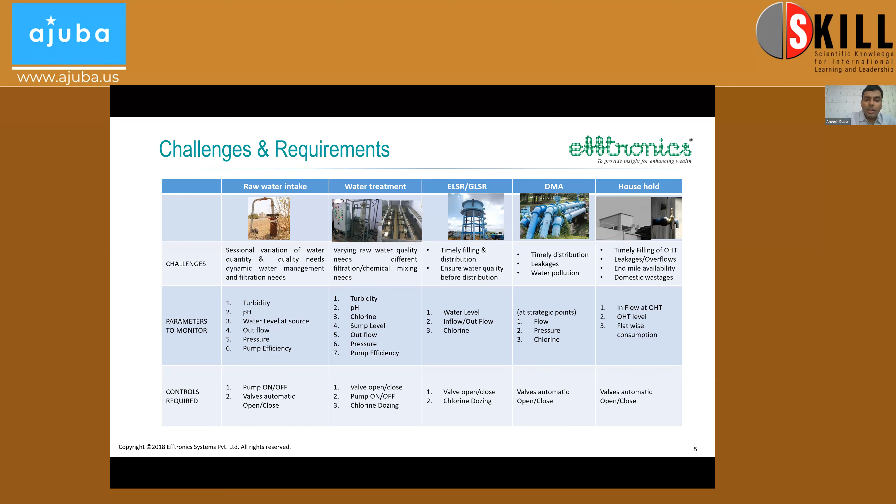Now I will deep dive into the solution. The solution we have built is based on IoT and machine learning. The IoT devices are equipped with various sensors for quality—turbidity, pH, chlorine content, and so on. For quantity, we have level and flow sensors, and for automation, we have valve controls and so on.

This solution also uses the latest machine learning and data analytics to provide better insights from the data captured by these sensors. The ultimate objective is to provide the right quality of water, the right quantity of water, at the right time, and to reduce water wastage and improve the efficiency of water distribution. This is the main purpose of developing this solution at Efftronics.

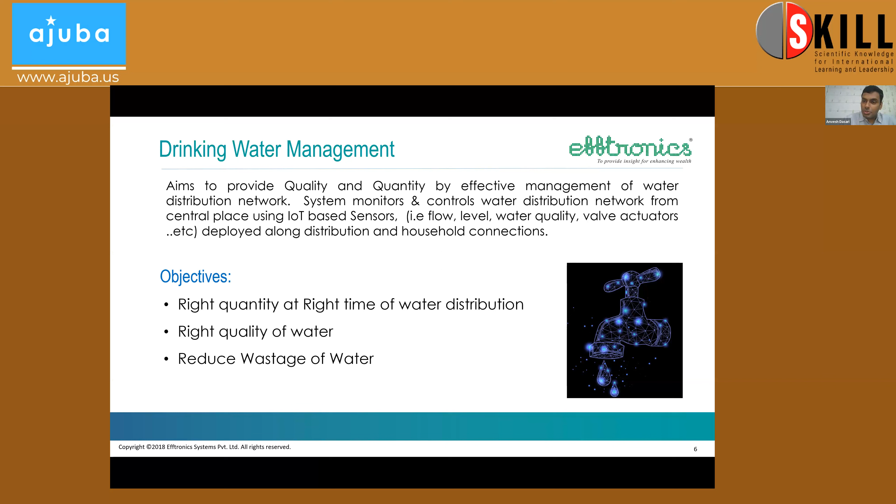One feature of this solution is that it provides 24/7 continuous monitoring. In many places, people have monitoring within silos, but this solution offers continuous monitoring with highly accurate sensors. The accuracy of sensors is very important when deploying these solutions, especially when measuring water quality.

We also sample at very frequent intervals. Some solutions in the market sample at one hour or so—if that is the case, are we really able to identify water wastage? The solution we developed caters to a high sampling rate of less than a second, and the entire solution can store and crunch millions of data points.

There is also advanced analytics and interactive dashboards. This solution is 4G and 5G compatible, so we don't even need communication through copper or fiber cables at every geographic location. It generates real-time alerts to maintainers or operators of water distribution, and there is automation to reduce manpower, which is also a very important resource to conserve.

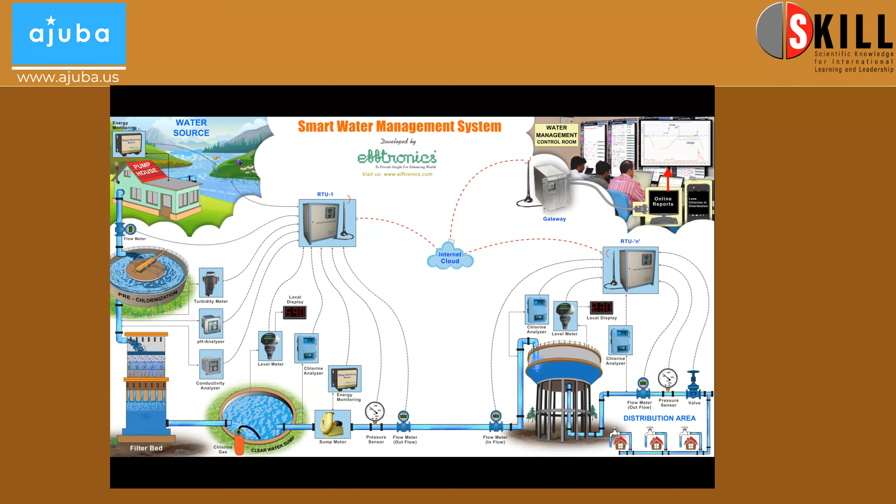Now let us look at one of the case studies. This is for one of the colonies of one of the public sector entities in India, where they have got their own community of more than 1,000 apartments, where they're able to monitor entire consumption of water, as well as create billing and all that.

So now, as I talked initially, let us address each of the stages in water distribution. First is intake well or the source of water. Here, we are measuring 3 or 4 important parameters. One is what is the intake of water we are taking from the source.

Similarly, what is the quality of water like turbidity and pH? Using this sensor, the software can recommend how much alum needs to be mixed in the water to reduce the turbidity. In some areas, the turbidity is so high, we have to introduce alum before even giving it to the treatment plants. Then we also monitor the energy consumed by these pumps, because if those are not efficient enough, we will have high power bills and increase the operation cost.

Here, we are also deploying ML technology, machine learning. We know how the pumps are consuming power - there is a signature of pump operation. Those signatures were fed into our anomaly detection algorithms using machine learning, and those algorithms are able to predict if there is any failure to the motor. This will also enhance the availability of water and reduce sudden outages or sudden breakages of these motors and pumps.

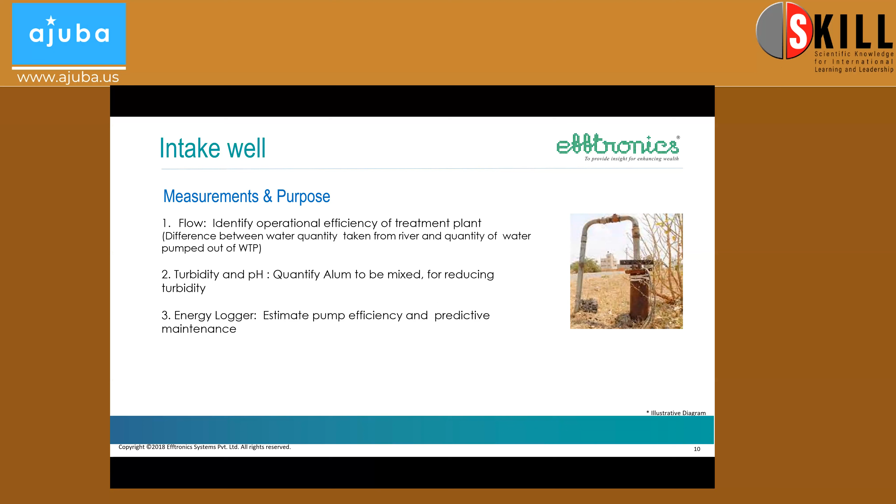The second stage we have got is water treatment. For water treatment, again, we also measure what is the inflow and outflow of the water treatment. Similarly, we measure the quality parameters like free chlorine, turbidity, and pH. Here also the treated water is being pumped to the elevated reservoirs through pumps, where we measure energy, pressure which is important to maintain the head, and also outflow of water.

So using this, we are ensuring the right quality of water is being sent out of the treatment plant. We are also ensuring the pumps are energy efficient, and we are ensuring the required pressure is being set so that the water can reach the end line.

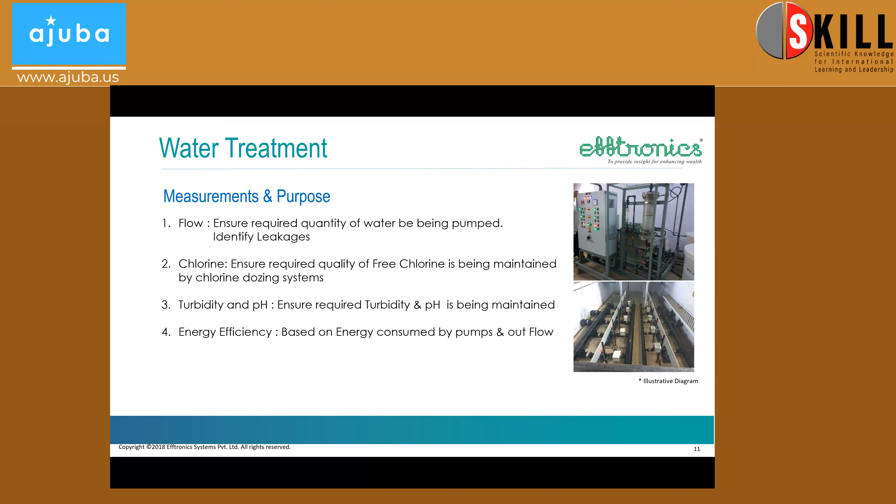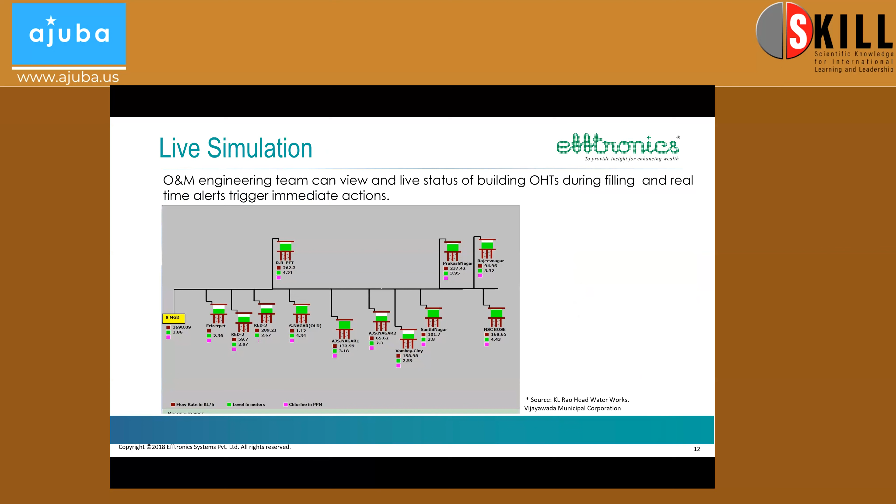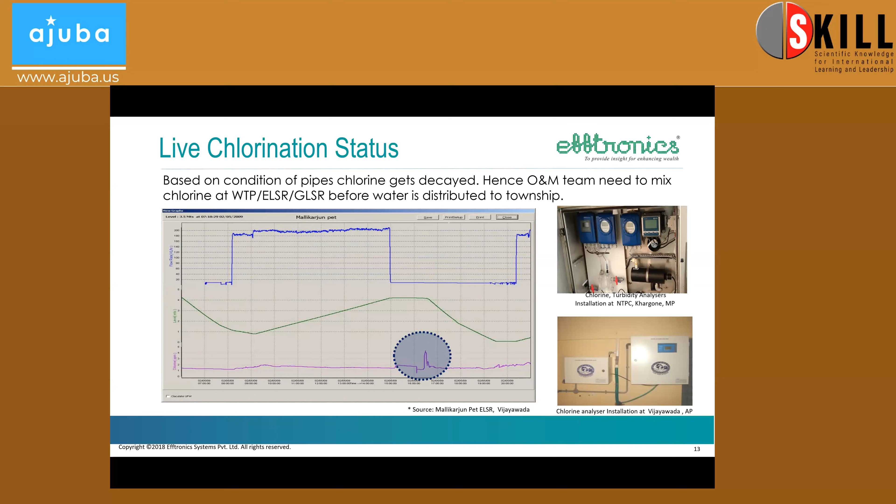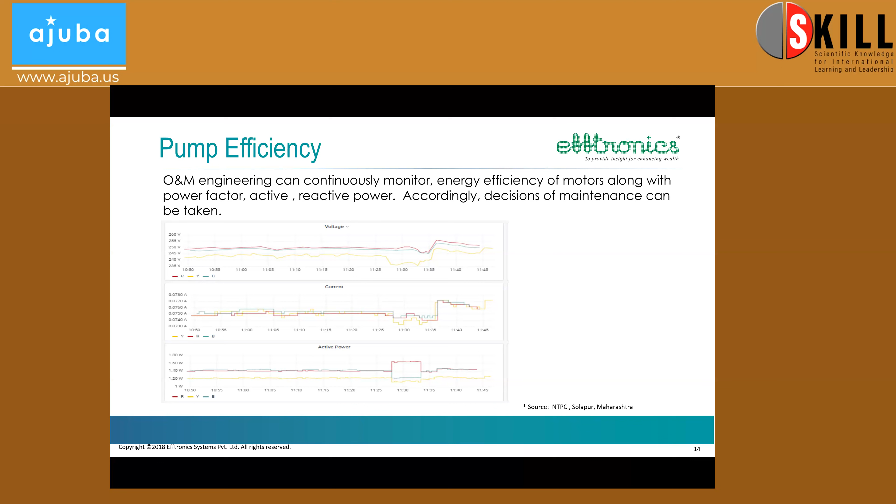Again, we can also see the live status of all the parameters on mobile phone as well. Let's say there is a city commissioner who wants to see what is happening to the water distribution, whether the entire network is intact - he can see it on his mobile, tablet, or PC as well. Based on the persona of the user, these screens are designed.

Let's say the commissioners will get MIS reports, while the local operator or engineer will get a more detailed report. So those kinds of dashboards are created based on the persona of the user. Similarly, the summary reports show weekly, monthly consumption and performance, so that we can see whether the system is improving or degrading and so on.

The third stage we have is elevated level reservoirs or ground level reservoirs. Here, we are monitoring flow for quantity, level, and quality measurements, again chlorine content. So what is happening is water is coming from the treatment plant and reaching the elevated level reservoirs.

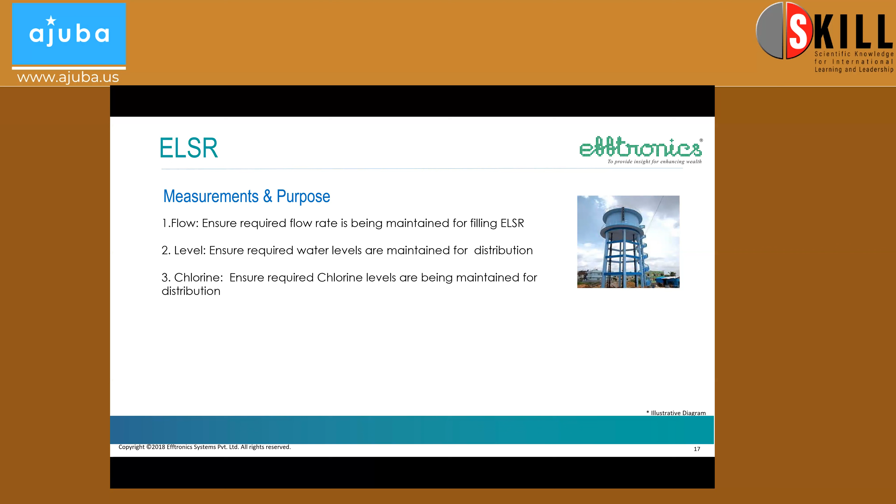again done at the elevated reservoirs so that the citizens can get the right quality of water. So here, this is one of the use cases where water is flowing out of the tanks, which is wastage of water. This is measured through a level sensor on top, an ultrasonic sensor.

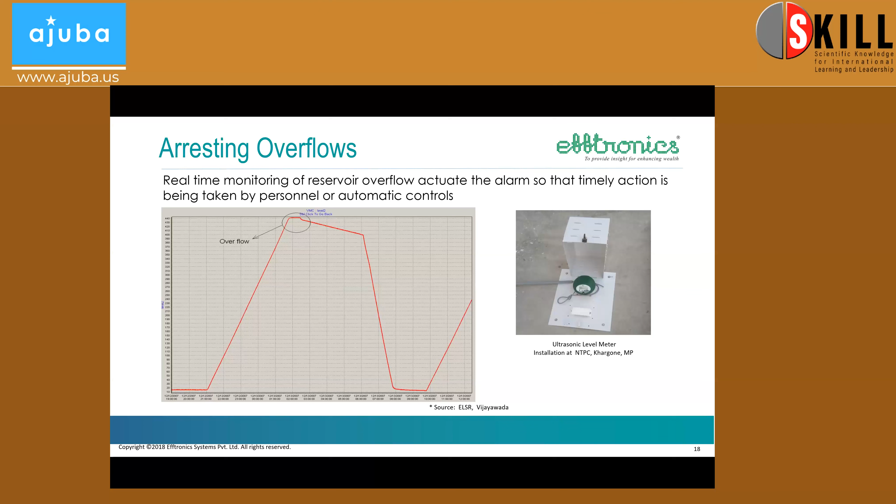Similarly, whether people are periodically maintaining the reservoirs can also be seen through the sensor data. Generally, in these ELSRs, there is a separate valve called a scour valve, which is opened when they want to clean the reservoir. Whether the people have really cleaned it or not can also be verified with the sensing data.

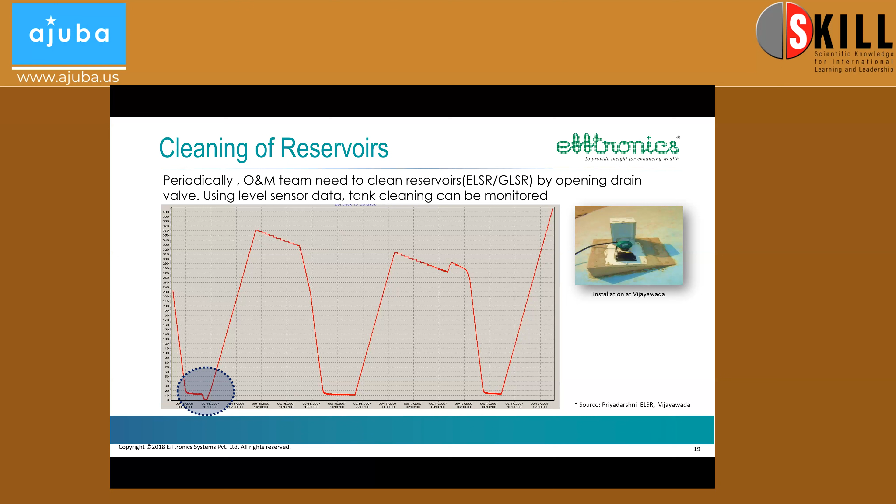Similarly, as we are measuring both outflow of the treatment plants as well as the inflow of these reservoirs, we can identify how the wastages or unaccounted for water is there in this distribution. So here we are fusing the data of sensors with analytics to understand this wastage. Using this data, we can identify which pipeline or through which route the wastage is more, and once people act on it, we can reduce the wastage of water.

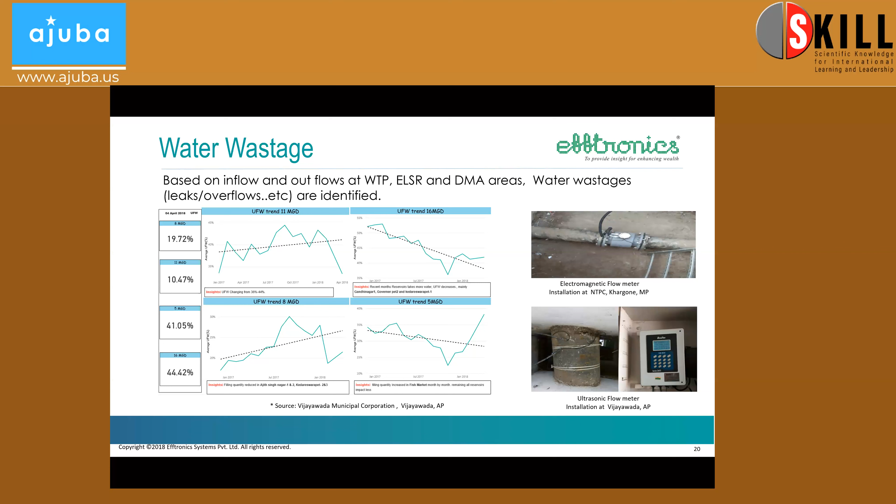So in one of our deployments, by deploying this solution, the unaccounted for water has been reduced from 32% to 5.5%. This is not only the success of the solution, we have to also appreciate the efforts taken by the customer as he acted on the data and took corrective actions immediately.

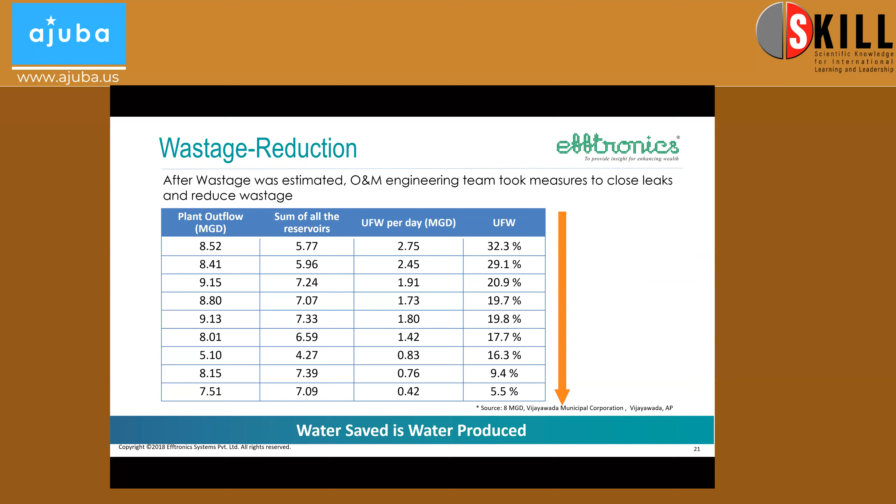The other important benefit of this solution is today the water distribution infrastructure is designed by city officials by forecasting the next 20-30 years or so. But in some places, the migration of citizens can be so high in some parts of the city, and the demand for water will be very high. Similarly, in some geography in the city, the demand may not be up to mark. But whether the infrastructure which we created much before really addresses this, or are we really catering to the needs of the citizens?

To understand this, we also created machine learning based algorithms to identify the demand versus supply, whether the water supply is sufficient for the demand of the citizens. Even this can be identified through the software and machine learning.

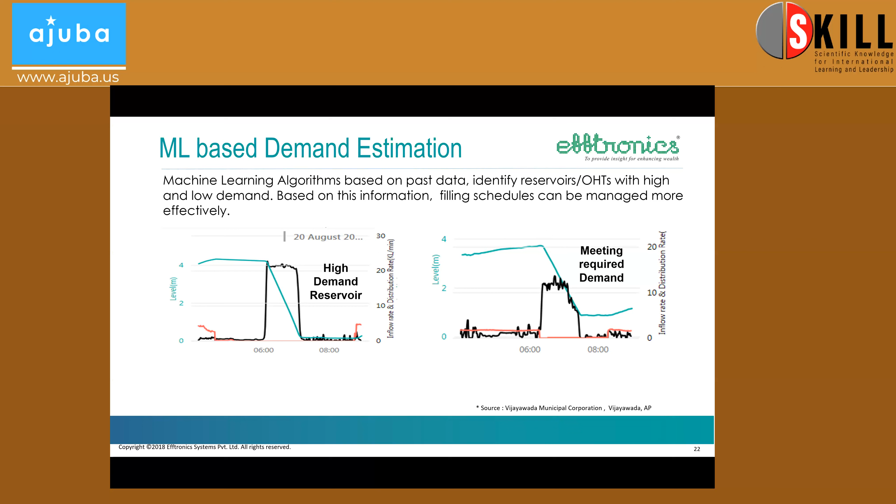The other benefit is during crisis. If there is any crisis because of floods or anything, this kind of real-time monitoring solution with IoT will help city officials manage the water efficiently for all citizens in the city. Even this was one of the case studies where some of the treatment plants got submerged, but still the city officials were able to give the city water with the other remaining treatment plants available.

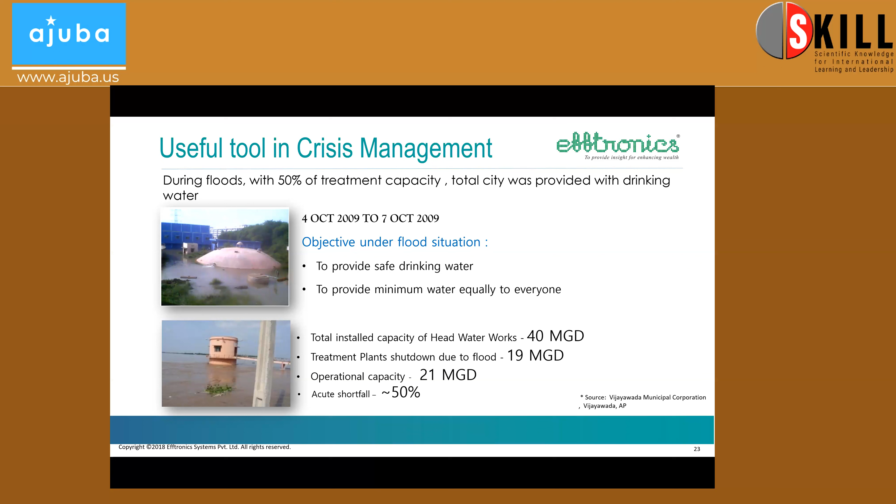So from the treatment plant, we came to elevated reservoirs. Again, from reservoirs, the next stage is district metered areas, or the colonies, or the citizens. One of the important KPIs is whether they're distributing the right quantity of water as well as timeliness of delivery. That is again monitored as a KPI for every district metered area.

So this is like plan versus set schedule - what is the actual planned distribution time and what was the actual distributed time. This will improve the efficiency of operations and bring in accountability of all the users or operators, and this will improve the customer or citizen services, the quality of citizen services.

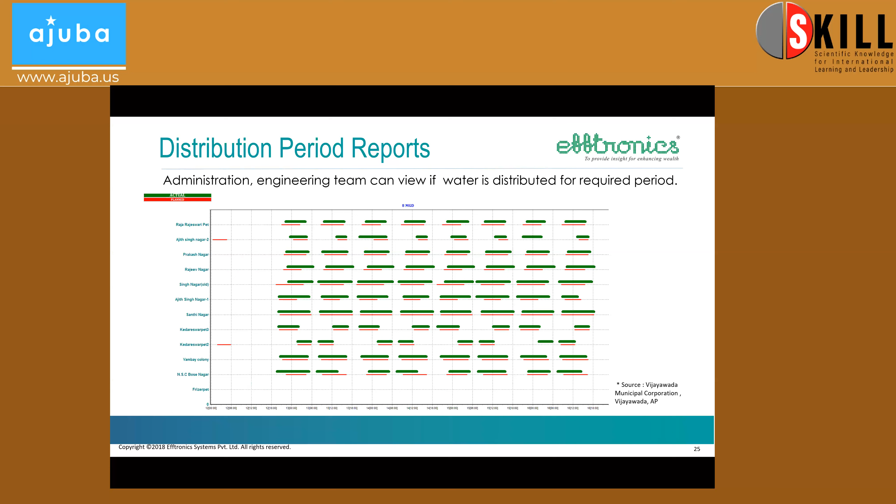Finally, the final stage is household supply. Here, we have got water meters. These are again ultrasonic, very reliable water meters, which can even withstand up to 70 degrees centigrade. So here we can see the consumption apartment-wise, house-wise.

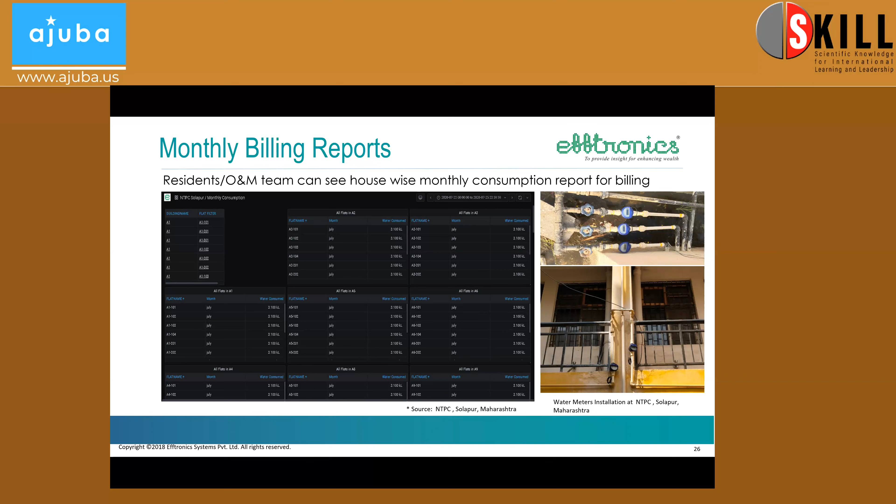Again, we can create billing for that. Even we can give these consumption reports to the users also so that they can understand how they're consuming water, and even start understanding the trends and how they can reduce wastage. Here we even have more detailed granular data, like how the kitchen is consuming, how the washrooms are consuming, with more detailed graphical representation. This helps users to start thinking about the importance of water and conserve it.

Similarly, it is building wise, apartment wise, house wise, we can give these reports. Again, if somebody has any kind of problems, they can log call logs, and city administration can act on this so that the distribution system can have better service levels.

All this is maintained at the command control centers, and they can see the live data, live status of everything, so that any alarms will be generated - if there is quality issues or more wastages, it will generate an alarm. If there is a schedule mismatch, it will generate an alarm. So it generates a lot of alarms and notifications along with live dashboards.

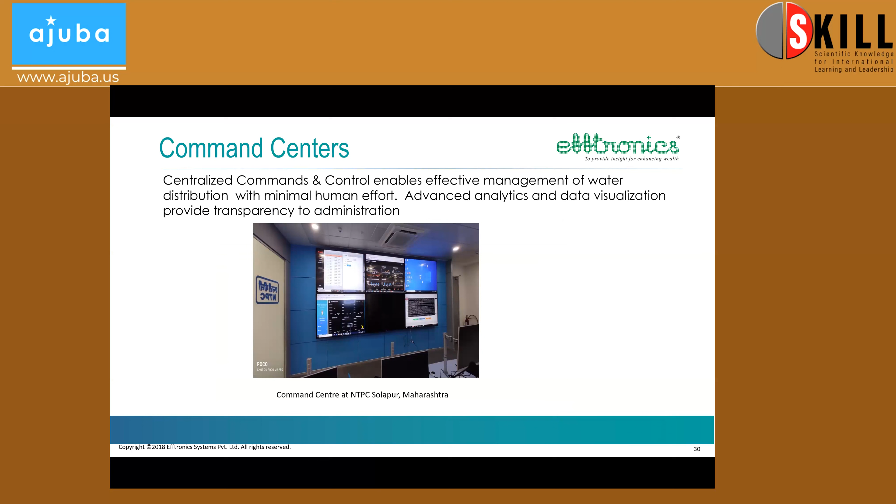So this is one of the solutions I was talking about: water distribution. It is for drinking water.

The second solution I'm talking about today is wastewater management, where the main goal is zero discharge, so that treated water is sent back from our premises to the outside. This is very important even for big, large communities. This was done for one of the big thermal plants, because they have to ensure water is discharged adhering to pollution control board guidelines. It's also important to bring accountability to wastewater itself.

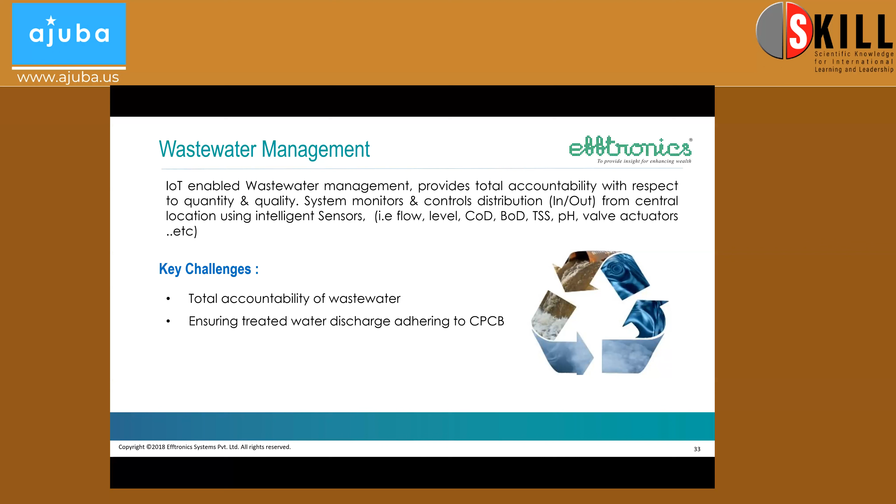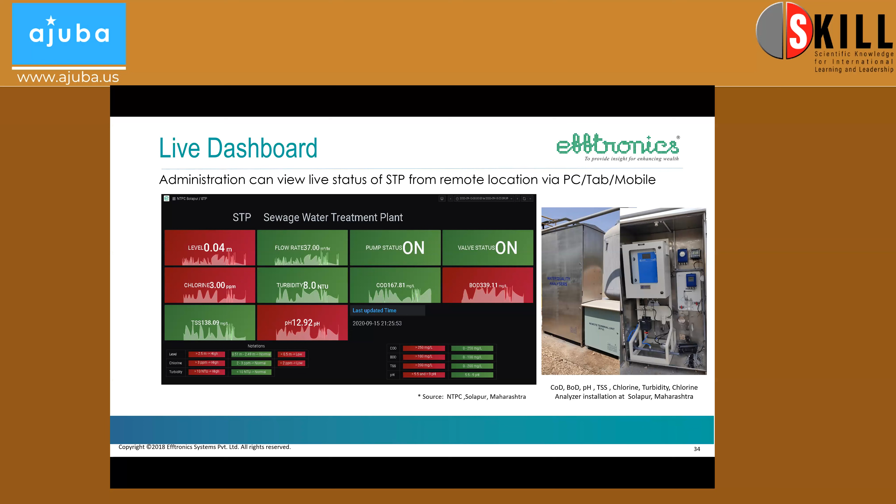On the right we can see the different sensors. It's called a multi-parameter analyzer, connected to an IoT device. This analyzer measures different parameters like COD, BOD, pH, total suspended solids, chlorine, and turbidity. All these parameters are captured in real time by the IoT device and sent to the central dashboard. Here we generate alarms based on thresholds. If some value exceeds the required threshold, we generate alarms and people act on it. We can see the trends, periodical, monthly, daily, weekly.

The third solution I'm going to talk about today is irrigation and making it smart and autonomous. It's very important to have beautiful landscapes, not only for healthy living but also for a healthy mind. So how do we create this eco-friendly smart irrigation? What we've created is an autonomous system which adjusts the watering schedule of plants based not just on water, but on weather, soil condition, and other water parameters.

Let's deep dive and understand the solution. There are three subcomponents: the first is sensing, the second is analyzing and creating a decision support system, and the third is controlling, automation, and becoming autonomous. You've heard about autonomous cars - similarly, we can make the irrigation system itself autonomous.

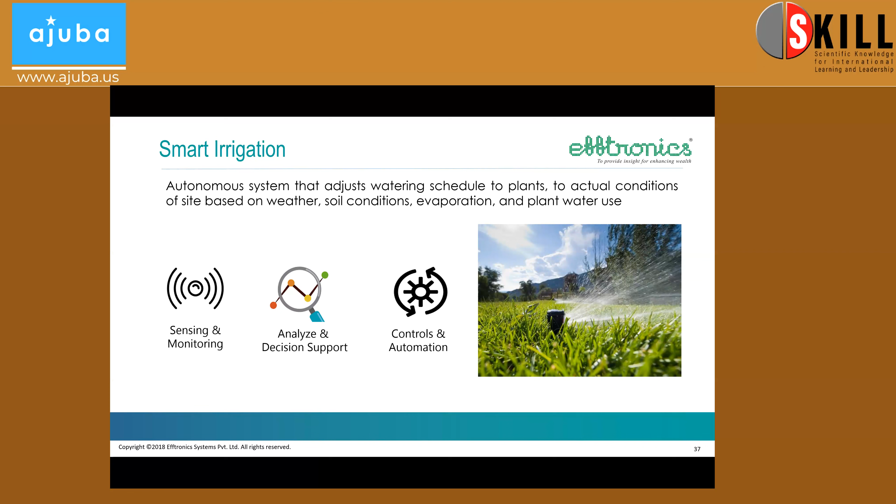Let's see that. The first important device we have is an evapotranspiration station, equipped with different weather sensors to understand the weather parameters. Then there are IoT devices to monitor soil moisture, and other IoT devices to control the irrigation system. The fourth aspect is everything is available on your mobile as well as the central software.

So this is the system we have - the evapotranspiration station, which monitors rainfall, wind direction, wind speed, and cloud cover, among other parameters. This data is sent to the central server.

On the other hand, we have IoT devices monitoring soil moisture and temperature. There are valves which can automatically control the drip irrigation on and off, a water meter to understand how much water is consumed for drip irrigation, and control of the pumps through on and off.

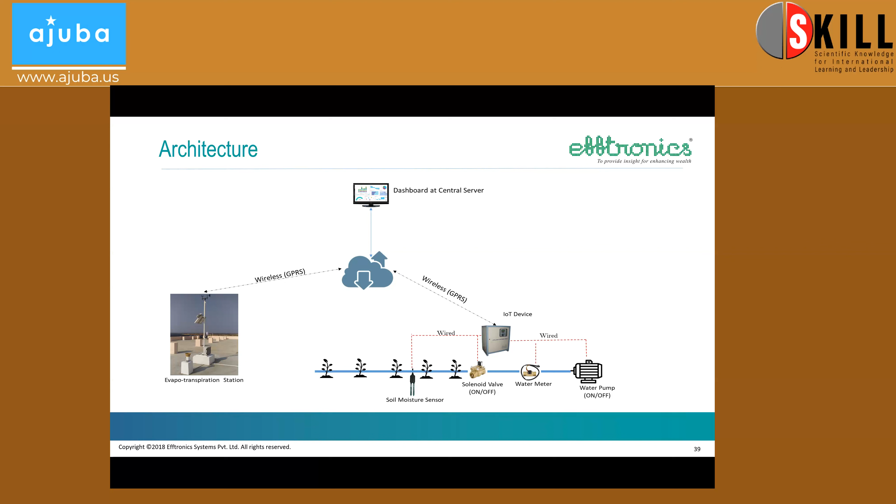Here's that water meter along with the valve, just for understanding. We can also see the pressure sensor on top, checking whether the required pressure is being maintained by the motor, and all this sensing data is available live at a central place.

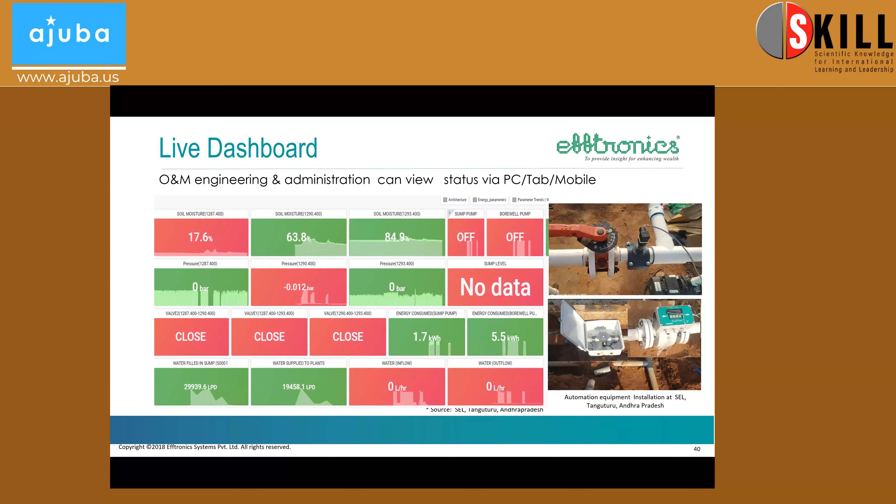Now the system has intelligence. First it takes inputs from soil moisture - what is the current soil moisture level? It also has a schedule - let's say watering every day from 6 to 8 a.m. At that instance, it will check the soil moisture level. Let's say it already rained at night, then there's no meaning to water again. So based on the current moisture level and the schedule, the system will intelligently decide whether to switch on the motors and valves, or not.

Once the watering is done, the system also takes feedback on whether the required soil moisture has been given to the plants. The next stage we can evolve the solution to is, based on the type of plants, ensuring what moisture is required and controlling water based on the type of plantation we have.

So this is the complete autonomous solution. With this, we are conserving water because we're not watering when it's not required. We're saving energy with automation of pumps and valves, and it's also a great comfort to operators because it's completely autonomous.

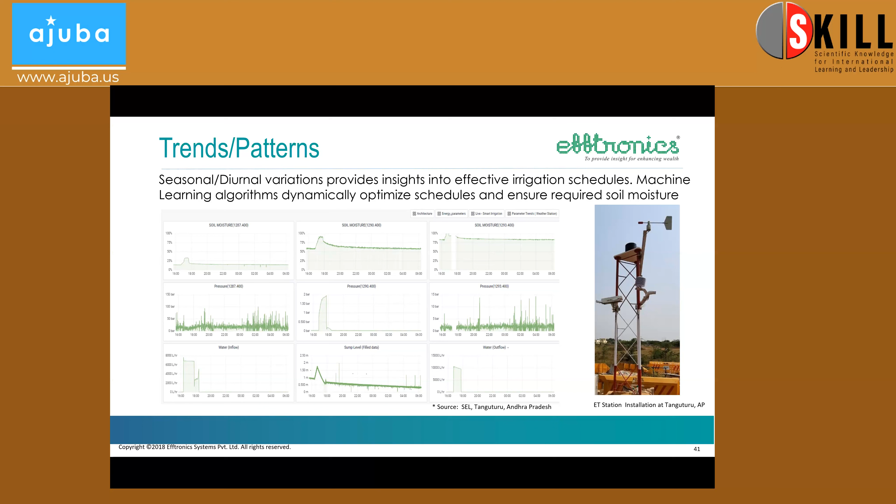This is deployed at multiple places, like national highways, where they want to have a median with irrigation. Today in India, and in a lot of other places, there are lots of kilometers of highways where the central median can have a lot of greenery.

So that can have a plantation with this kind of autonomous irrigation system. People don't find it difficult; it's very easy to deploy and maintain these plants and trees across the highways and other geographies.

So these are some of the solutions we have done to conserve water and to achieve our sustainable development goals of 2030. Thank you all.

Excellent, amazing insights, Anvesh. Really kind of you to delve deep into all three different applications of water management. Anvesh, there were several questions that came up, let's go through those.

So the first question, Anvesh, that came up in the registrations is, could you talk about the different IoT sensors that are available? I'll club two questions together: what are the different IoT sensors available, and how to choose the right IoT device?